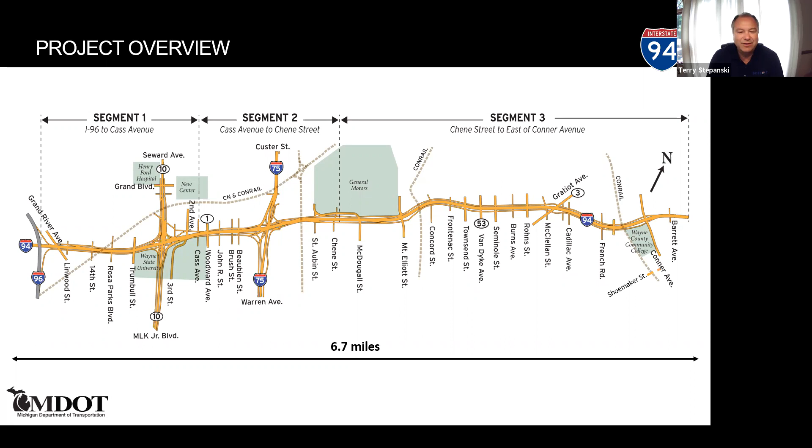So we are very excited about moving this project forward. Now just a mention of what we've been working on - we're going to be moving forward with the corridor construction in the near future, but we have been working on a variety of bridges since 2013.

The Van Dyke Bridge has been reconstructed. We've reconstructed the Woodward Avenue Bridge, and the main driver for that was to accommodate the M1 rail project. We reconstructed the Trumbull Bridge, the Chene Bridge, and the Gratiot Bridge over those years. Then in 2019, we moved on to other bridges that were in need of repair, including the Brush Street Bridge, the Concord Bridge, and the French Road Bridge.

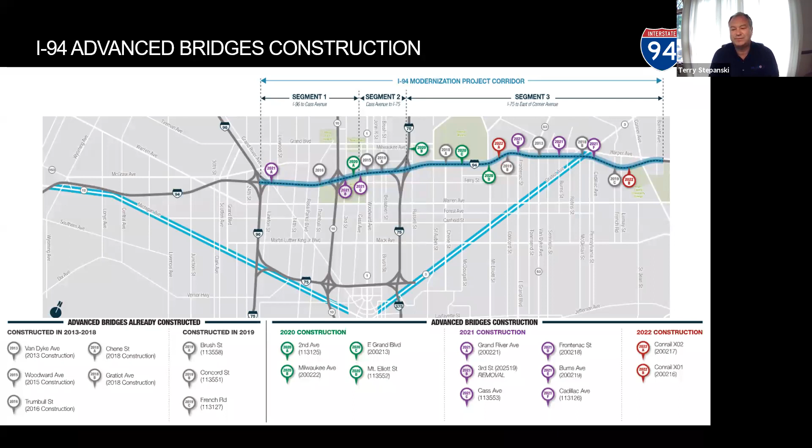And we're using some innovative construction to build that. We're constructing it in a parking lot on Wayne State University, the Palmer Avenue parking lot, and we're setting it on self-propelled mobile transporters and rolling it into place. We're doing that to minimize the disruption to traffic. This type of construction really fits this type of bridge, so we're excited about moving along on that.

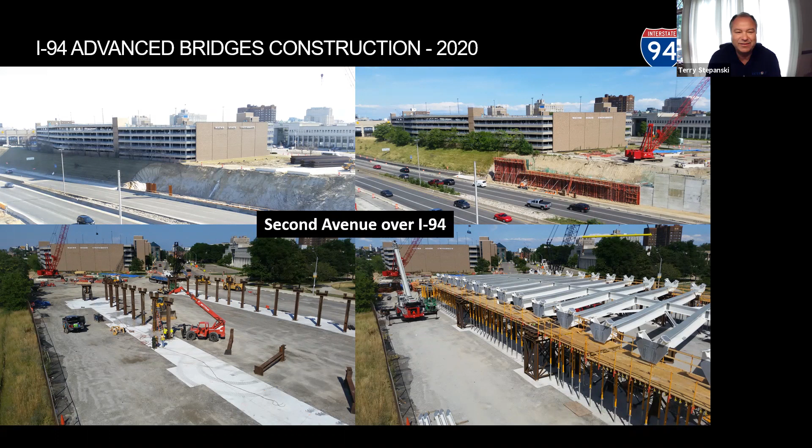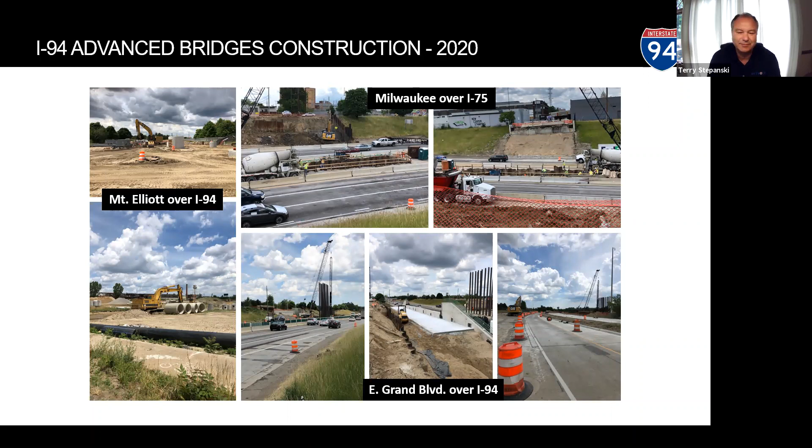So we started a study, and the Federal Highway Administration said, yes, you're doing the exact thing that you should be doing. You're listening to stakeholders, but you have to start a formal study to make sure you're doing exactly what you should be doing. So based on our stakeholder comments, we started this formal study called the Supplemental Environmental Impact Statement, and we've been working towards that. We just reached the major milestone of approval from the Federal Highway Administration on our final Supplemental Environmental Impact Statement and Record of Decision. That gives us approval to move to subsequent phases of real estate acquisition, design, and construction for the corridor, for the main section of I-94. So that's where we're moving in that direction.

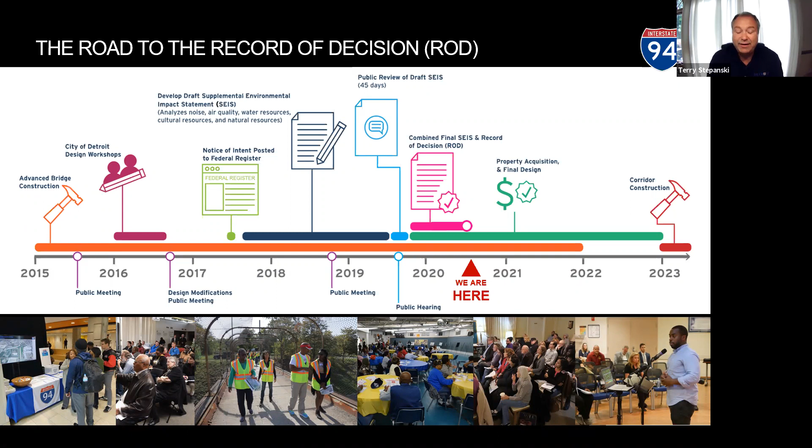So with that, I'll turn it over to John Baldauf, who will talk in detail about some of the things that I mentioned thus far.

All right, thanks, Terry. So what I'm going to cover today is give an overview of the combined final Supplemental Environmental Impact Statement and Record of Decision, what's included and what does it mean.

To kind of kick things off, the combined FSEIS and ROD includes the following. The first thing is how MDOT responded to comments received on the draft SEIS and at the public hearings. It also marks the approval of the alternative that will be built for the I-94 project, and we'll go into some detail on that. The document also includes final mitigation measures, or commitments, that will be implemented to address project impacts. Finally, the record of decision marks approval of the project to receive federal funding for construction and begin property acquisition, final design, and construction of the corridor improvements.

So where to find the document? It is available on our project website at i94detroit.org. We have a link on our homepage on the lower part, and once you click that, it brings up a new page in which you can view and download the different parts of the document for your viewing.

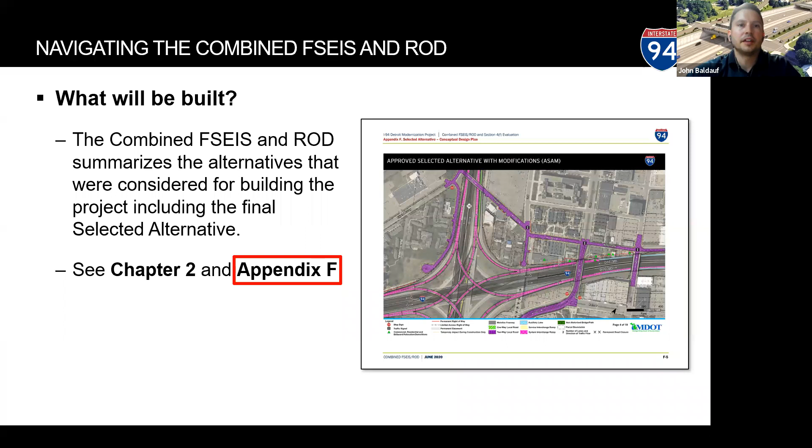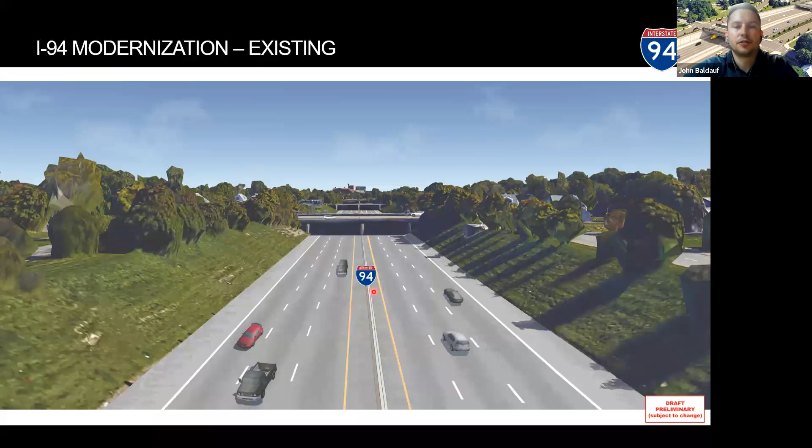So what will be built for this project? Terry gave a good overview of this at the beginning of the presentation. What's on the screen now is a rendering of the existing I-94 corridor. Today it has narrow shoulders on the inside, only 3 lanes in each direction, and one of the key things is it has these grassy slopes throughout the project limits.

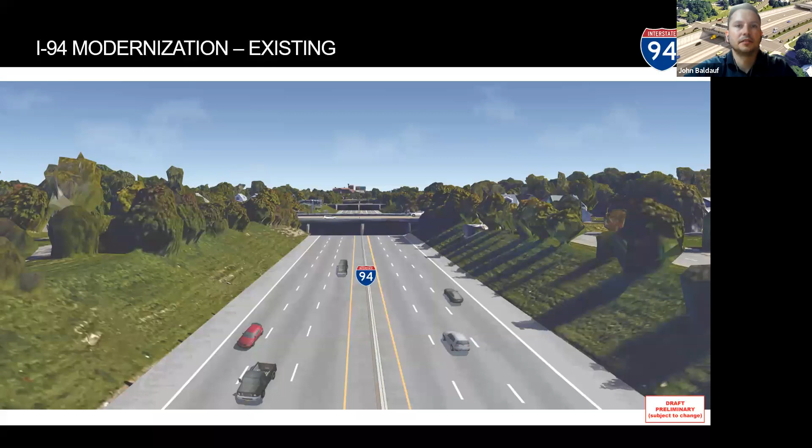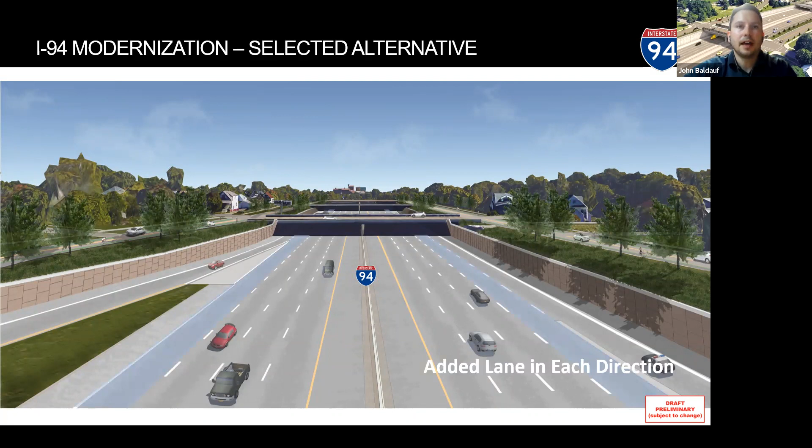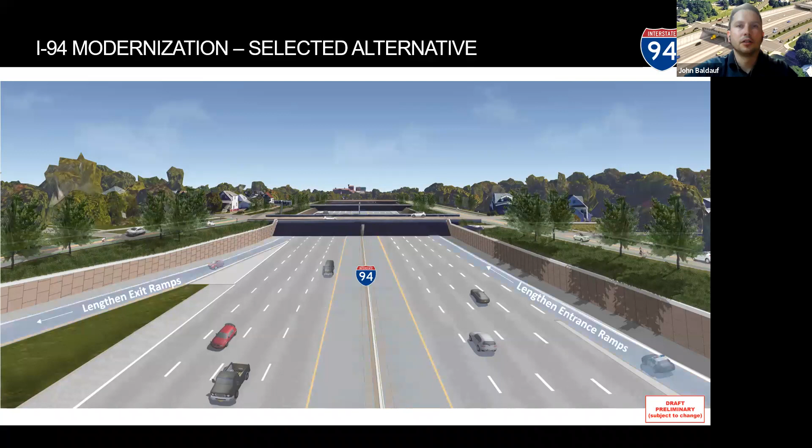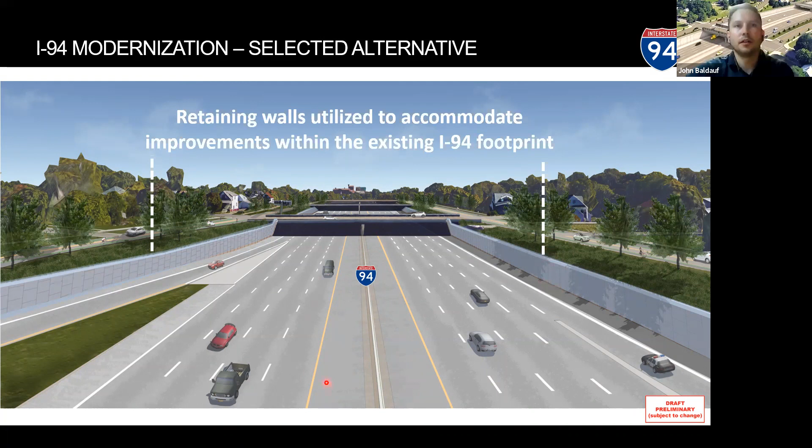Looking at the future design, we're looking to add 1 lane in each direction to improve safety and capacity. We're also looking to widen shoulders throughout the entire project limits, providing space for disabled vehicles to pull over safely off the freeway, which isn't available today. We're looking to lengthen entrance and exit ramps to give users more time to safely maneuver on and off the freeway. As Terry noted, these improvements are done within the existing footprint of I-94, by cutting into those grassy slopes and constructing retaining walls throughout the corridor. When the project's all said and done, it'll be very similar to the 696 corridor.

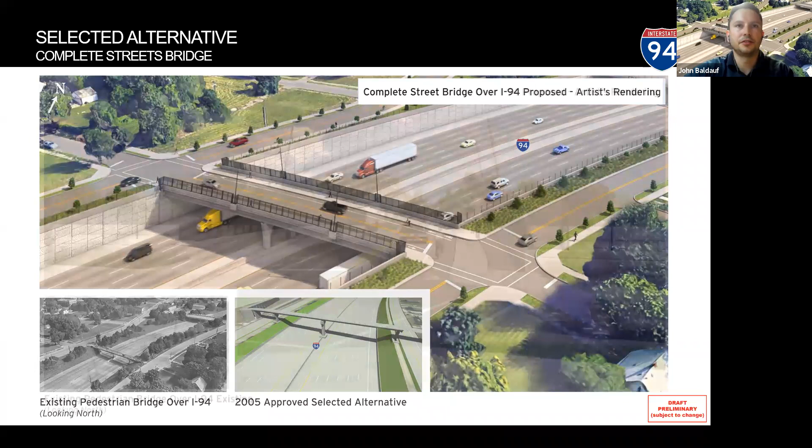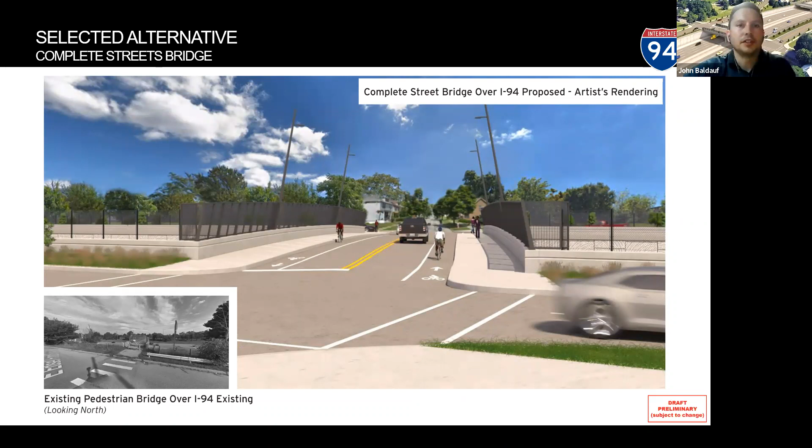Another addition to the project is the Conner Avenue interchange, actually the Iron Belle Trail Bridge, which is a separate non-motorized bridge that separates pedestrian and bike users from the busy interchange traffic here at Conner Avenue.

One of the key reasons is we have the Iron Belle Trail. The Iron Belle Trail is a statewide trail that runs from Belle Isle all the way up to the Upper Peninsula. This is actually the biking portion of the trail. Here we're able to provide this separate bridge to safely get your bike and pedestrian traffic over I-94 away from the busy interchange at Conner.

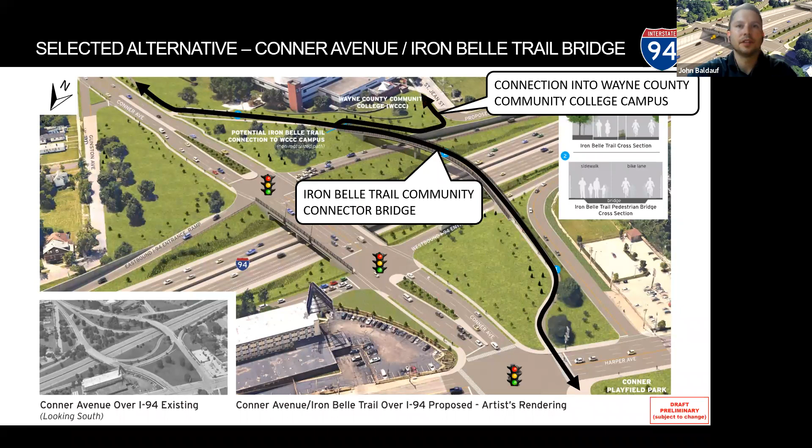One of the cool things we are able to do is accommodate a connection into the Wayne County Community College campus as well, and that was really driven by feedback from stakeholders. This is a view of what the bridge could look like, and you can see it's a much wider bridge than a typical pedestrian or non-motorized structure. We actually have enough space to separate pedestrians and bicycles on the structure itself.

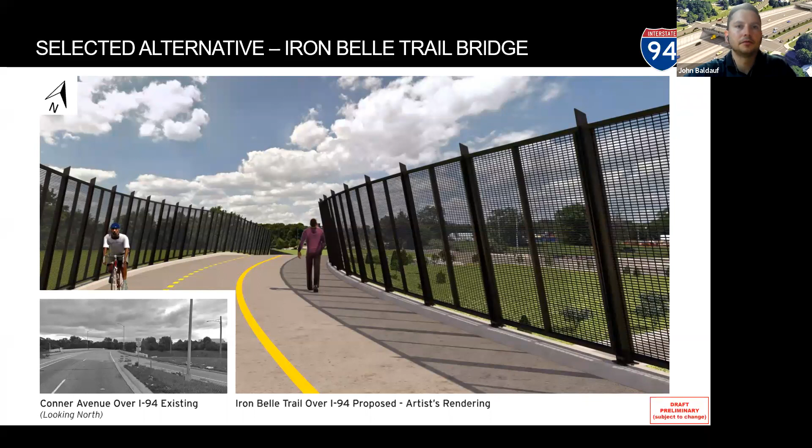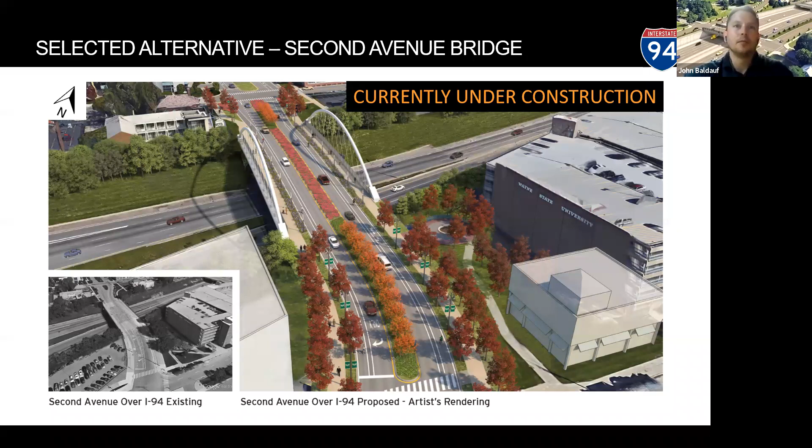You can see it's a very wide structure and also has landscaping and enhanced aesthetics across it. Working with stakeholders in the city of Detroit, the intent of the design of this bridge was really to not make it feel like you're crossing the freeway when you're crossing the freeway. In this next slide, we're headed northbound on 2nd Avenue, and you can see it doesn't look like we're approaching the I-94 freeway. With the aesthetics and the wider features, it provides a really nice crossing here, in the heart of the Wayne State campus and the Midtown New Center area.

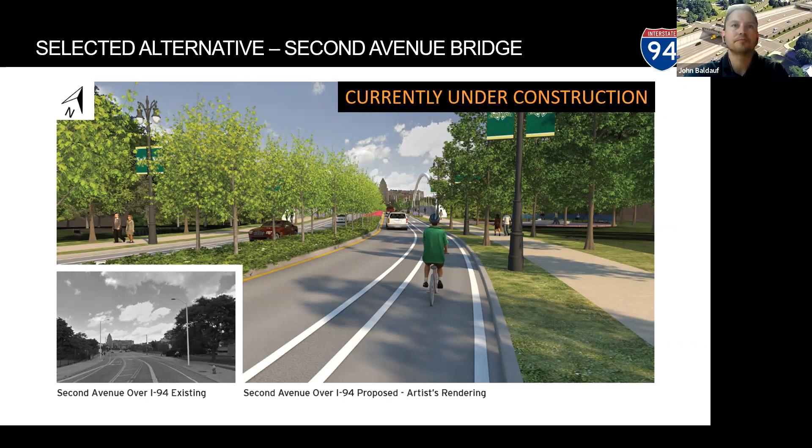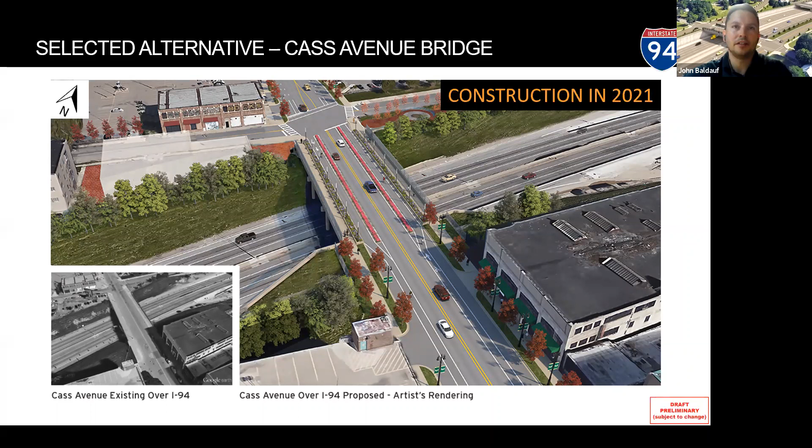A similar type bridge is the Cass Avenue Bridge, another very important connection to the community. You can see it's a very similar cross-section to 2nd Avenue. It's not a network-tied arch, but it is a traditional style structure, with a very similar cross-section as 2nd Avenue. It has the wide sidewalks, the bike lanes, and the landscaping and aesthetics across the bridge itself. This is a street view looking towards the north, and you can see it's a very wide structure, and you don't see the freeway as you're approaching.

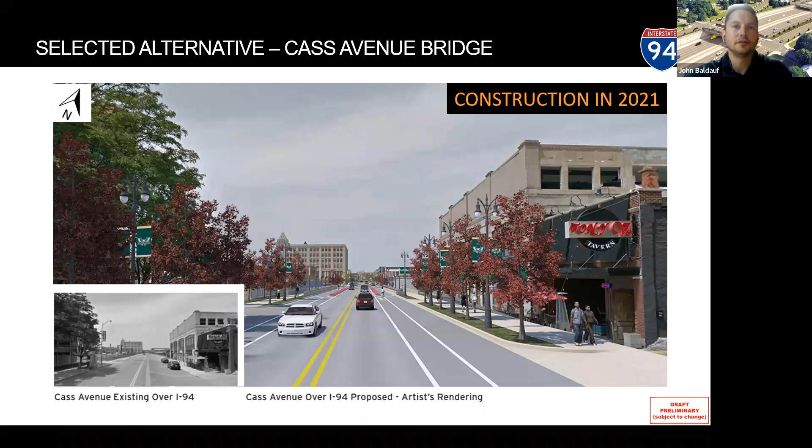Moving on, I think one of the big questions is, how did MDOT respond to comments made during the official comment period last year and at the public hearings?

In the document, table 1-3 includes a detailed table with a summary of the comments that were received and MDOT's responses to those comments. In this section, we grouped similar type comments based on the topic or theme, summarized those comments, and provided the response on the right-hand side of table 1-3.

So what mitigation measures has MDOT and FHWA agreed to in order to minimize impacts to the community? What's included are mitigation measures which will address United Sound Systems recording studio, transit planning, landscaping, stormwater management, matters affecting travel during construction, and many other issues.

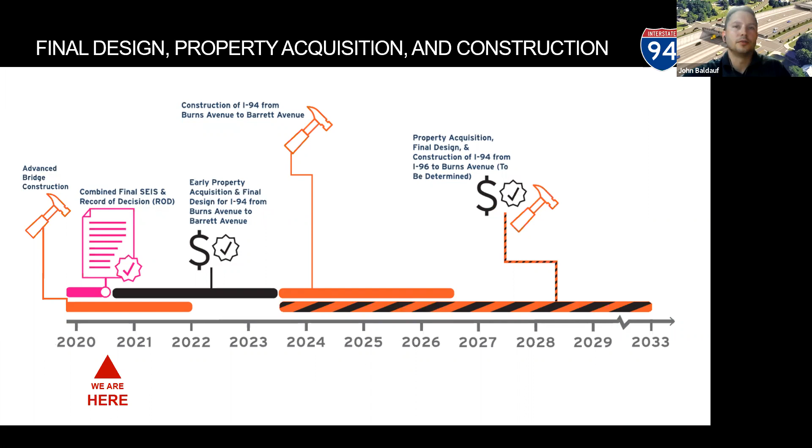Giving a little snapshot of that first freeway construction package, which is Burns to Barrett on the eastern part of the corridor. So it's a little bit west of Gratiot, where Burns is, and all the way to east of Conner Avenue. The construction will include complete reconstruction of the freeway, reconstruction of the interchanges at Gratiot and at Conner Avenue. The interchange at French Road will be removed, and we'll be reconstructing the remaining bridges in the corridor. There are a couple advanced bridges in this area, but we will be addressing the remaining bridges. This will also include full reconstruction of the service drives and drainage improvements and more.

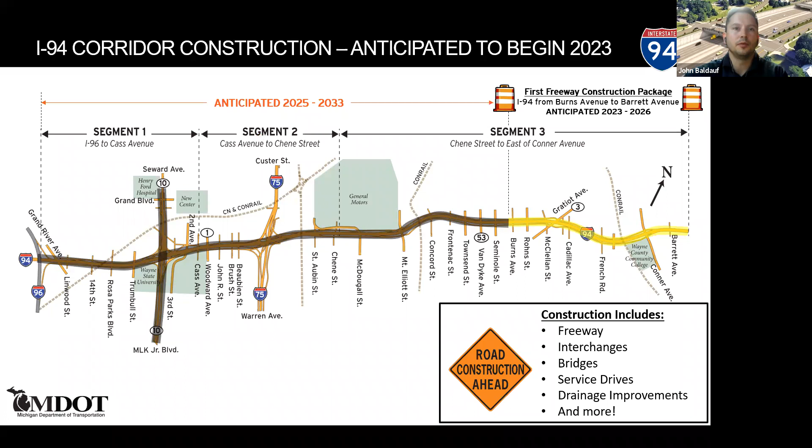Looking ahead, the remainder of the project will be constructed between 2025 and 2033. The current plan is to work our way from east to west, starting on the easternmost part of the project, then continuing west towards I-96. The details of that are still being worked out, but we'll continue to keep the stakeholders apprised of construction packages as they come forward.

With that said, our public engagement continues. Everybody has been very good partners with getting the project to the point where it's at today, and we want to continue that progress moving forward. As we move forward to construction, we will be starting property acquisition for the corridor construction.

Rebecca will give an update on where we're at with that today. We'll also be looking to get more feedback and continue to keep the stakeholders apprised as we figure out the details of landscaping and aesthetic features. One of the big things is road closures and detours as we start to get into construction—making sure everybody's aware of what we're planning on closing and when, and getting feedback on that to refine it as we move forward.

I did highlight landscaping and aesthetic features, and I think one of the key things when we get into that Burns to Barrett first construction package is the Conner Avenue interchange. We highlighted the Iron Belle Trail and are figuring out some of the final details of that. We'll continue to engage the public as those details get refined.

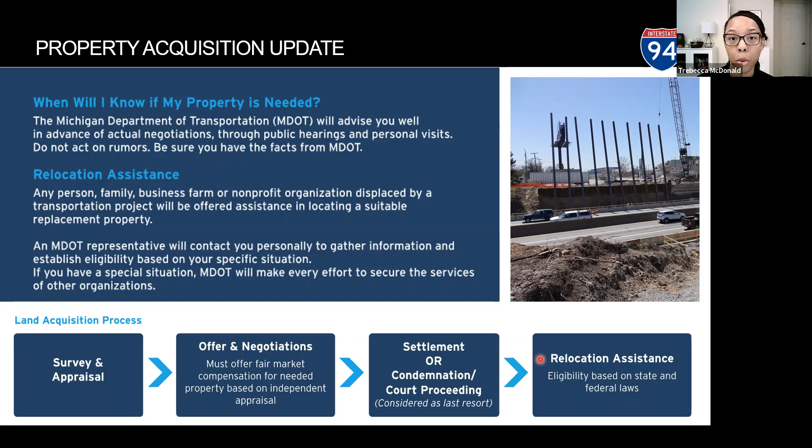Okay, Nate, back to you.

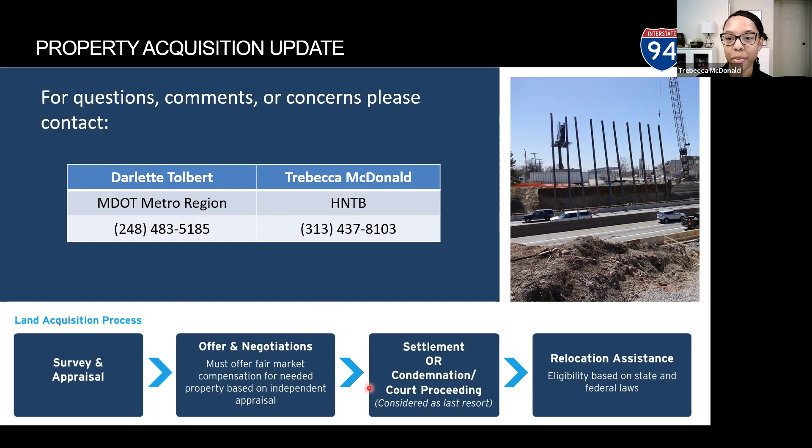Thank you, Trebecca. With construction starting or slated to start in 2024, we are already getting questions about how someone can get a job working on the project. Now is the time to start preparing for a job in the skilled trades. To learn about the available apprenticeship programs, please visit the I-94 website at i94detroit.org. It is the project contractors, not MDOT, that will be hiring for construction-related jobs. The contractors have not yet been selected, but once they have been, that information will also be listed on the I-94 website, and we will include it in our e-newsletters. As I said earlier, now is the time to prepare, so please visit our website for information about apprenticeship requirements and skilled trades opportunities.

So just to kind of go over the Iron Belle Trail Bridge again here, this will be a separate bridge. And again, we're looking towards the south here, so the bridge will be west of Conner.

But today, for those familiar with the area, there are existing on-street bike lanes through this section of Conner Avenue, north of Shoemaker, all the way to Harper. I know the city has recently removed the bike lanes that are on-street between Shoemaker and Jefferson, and they actually constructed a new off-street cycle track, or two-way bike facility, off-street.

So what our project is going to do is connect into that and keep the bikes off-street. So while they're on-street today, they're going to be moved off-street north of Shoemaker, all the way north of Harper. And then north of Harper, the Iron Belle Trail, there's an existing off-street pathway that this will connect into. So this whole stretch now, bike lanes will be off-street.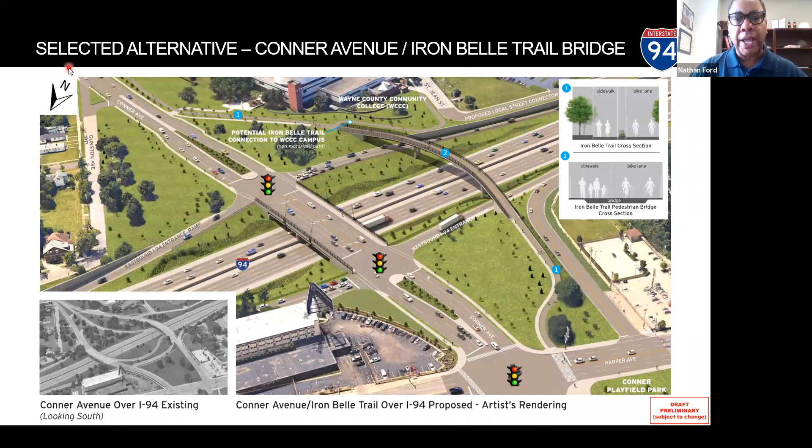Okay, and let me just follow up on that, Terry. So one of the models I think throughout the country, and I-94 really is leading the way, is the I-94 Small Business Initiative. And with that, we have already procured, or we are working with minority-based, women-based, women-owned consultants to actually do the design, to assist in the design to this point of the I-94 modernization project. So to answer your question, yes, and we absolutely hope to increase those numbers during construction.